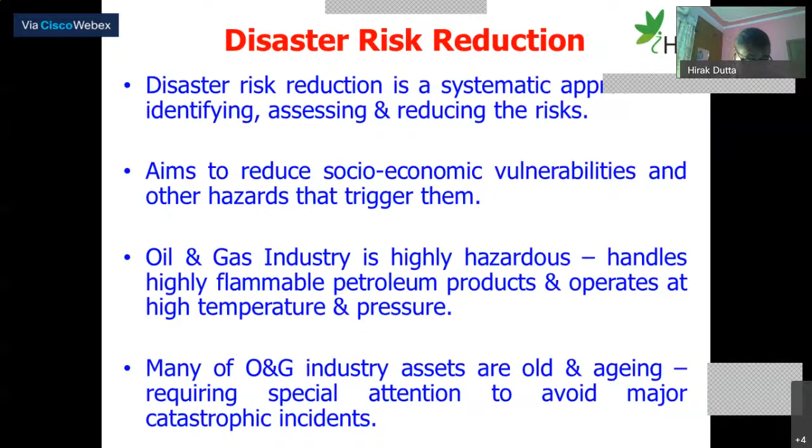There are many pipelines in the country and outside, in the US, which have been operating for more than 50 to 60 years. The Guwahati-Siliguri pipeline is a unique achievement of Indian Oil Corporation - this product pipeline is operating for more than 60 years. It is to the credit of Indian Oil pipeline people that they have been able to manage this asset very effectively and efficiently, and that's the reason we don't have any incident in the Guwahati-Siliguri pipeline.

Now coming to risk reduction in the industry approach - how do we reduce the risks? There are two basic approaches. One is the least preferred approach, which is PPE and administrative controls. I am not saying PPE is not important - wearing helmets, safety shoes, gloves etc. is important. Administrative controls are also important. But the most preferred option for the industry, which most of the industry and Indian Oil definitely does, is engineering control, which is very important.

As I move along, I will talk about some of the engineering controls undertaken by Indian Oil Corporation and many other industries to avert catastrophic incidents and stop disasters from happening. The focus is on how, through good engineering controls, we can reduce the risk - how can you isolate the risk, how can you eliminate the risk. When you talk about risk reduction, design is very important. Inherent safe design - if you can bring in inherent safe design, we'll be able to do a lot of good work in reducing disasters and ensuring we operate in a safe, reliable, and smooth manner.

Maintenance is also very important, and operation is also very important. So when you talk about risk reduction in totality, look at the bigger picture - design has to be good, we need to know how to operate, and we also need to know how to maintain things properly. These are the three important parameters. Unless we attack all these three things, we will not be able to reduce the risks. And if you don't reduce the risks, there will be unsafe situations and catastrophic incidents which may lead to disasters. Our basic objective is how to stop these disasters from happening, and if that happens, what should be done.

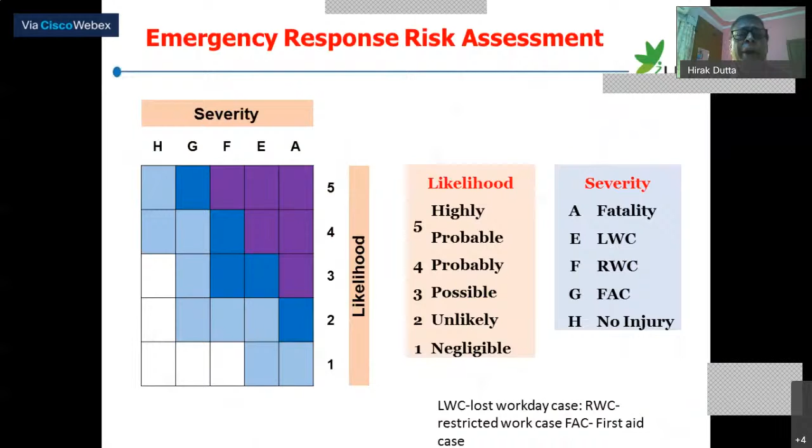Many of you probably know that the Bhopal gas tragedy, at Union Carbide, the fateful incident happened on the night of December 4th, 1984, which is just tomorrow. What had happened at the Union Carbide factory, which was producing pesticide, was the spillage of highly toxic methyl isocyanate, MIC, which was leaked in large quantity.

A large quantity of methyl isocyanate leaked from the Bhopal Union Carbide plant, and in that incident more than 5,000 fatalities occurred, with tens of thousands of people taken ill. It is one of the worst process safety failures, one of the worst disasters witnessed by industry till date. Why did this happen?

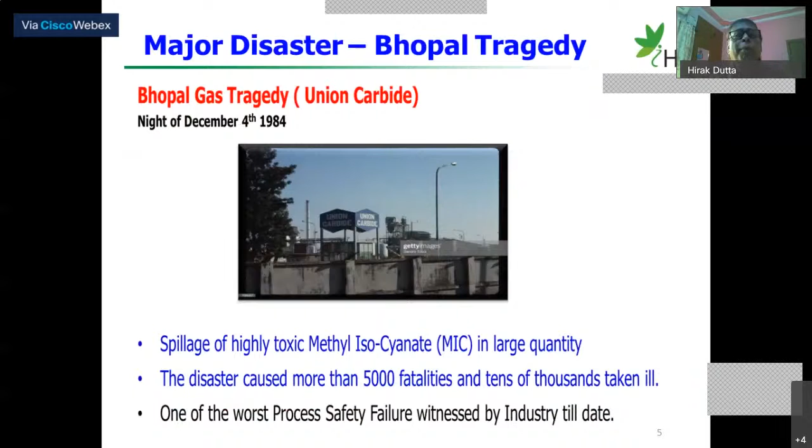Let's look at it and try to find out what engineering controls, what technological controls we need to bring into our system to avoid such major disasters. There was spillage of highly toxic MIC, that is methyl isocyanate, in large quantity from the pesticide plant of Union Carbide to the atmosphere. Now, what caused the incident?

Union Carbide was storing 55 tons of MIC, while daily usage was only 5 tons - that was a major error. That means your daily requirement of MIC was only 5 tons, and you stored 55 tons, which was not required to be stored in such a high quantity.

MIC must always be stored at 0 degrees centigrade, but the refrigeration system was not working, and no care was taken to correct it. It was giving problems for quite some time. People who have gone through the Bhopal case study know that the refrigeration system was not working, and in case there is a MIC leak, there is a scrubber system.

With the scrubber system with hydroxide, it could have easily neutralized the MIC, and therefore the release of MIC, the toxicity of MIC, could have come down. But the scrubber system was kept offline and it was disconnected from the flare.

Now about the flushing of the nitrogen pressurization line - when the plant had a choke in the line, they were trying to declog it with nitrogen pressurization followed by water flushing. But the blind flange was not used while they were water flushing the line.

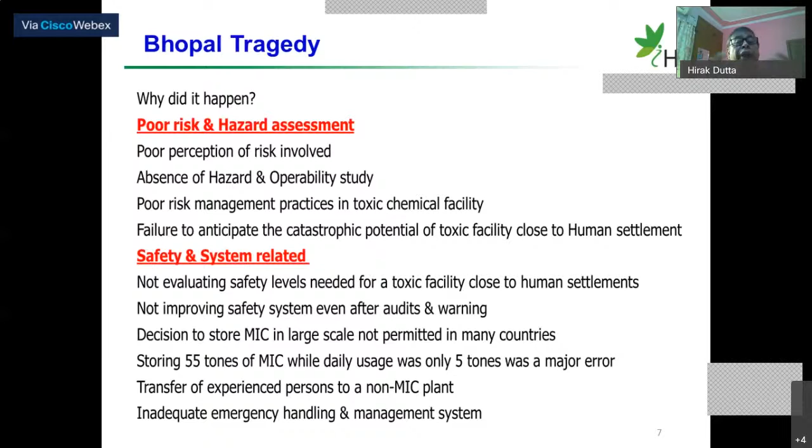But today, luckily, in our country, in many oil installations, we have set up facilities, so there are chances that in case - God forbid nothing should happen, but in case something happens - we will be able to take care of it. Now let me talk a little about the lessons learned from the Bhopal tragedy.

The conceptual framework on such disasters indicates that 80 to 85% of failures are due to leadership and management failures, and only 10 to 15% are due to human error. Most of the time people say it is because of human error - it's not correct. Most catastrophic incidents and disasters happen because of leadership and management failures.

Hazard assessment and risk mitigation measures must be carried out at the project appraisal stage - that is very, very important. Design is very important everywhere. At the design stage itself, do the hazard study, do the quantitative risk assessment study, and after doing the hazard study, incorporate layers of protection and risk mitigation measures.

That should be done at the nascent stage of the design itself, at the project appraisal stage itself. Handling such emergency situations calls for setting up of ERDMP. Luckily, in our country, in every oil and gas industry, in all installations today, we have an ERDMP, thanks to OISD, thanks to PNGRB, and thanks to NIDM, who are following up and trying to educate people on ERDMP, so that we have set up the ERDMP, and this will help us in a long way.

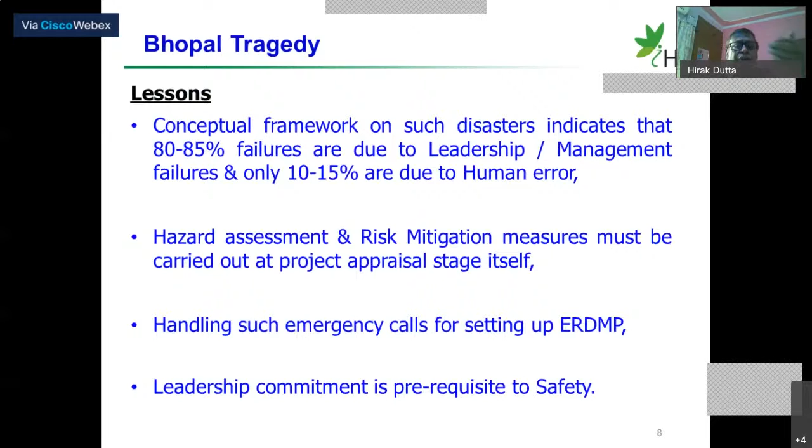Leadership commitment is a prerequisite to manage disasters. Anyway, everywhere leadership commitment is a must. If leaders are not committed, if they don't have that belief, then we will not be able to avoid such type of tragedy, and we will not be able to assure success, because it means good business. So leaders' commitment is essential to achieve success.

But since then, we have had a lot of catastrophic incidents in India and elsewhere too. We had the Jaipur tank terminal incident. We have the Tatipaka natural gas pipeline explosion. We have the FCC incident in Vadodara. We have the Unchahar boiler explosion, where multiple fatalities took place. And more recently, as I have mentioned, the styrene gas leak in Andhra Pradesh.

Luckily for Indian Oil and for many other industries, we have taken a lot of technical measures. A lot of engineering controls have taken place in the oil and gas industry, which has helped ensure reliable operation, and which has also helped ensure that risks have been brought down, catastrophic incidents have been brought down, and disasters have been brought down.

So my focus is on post-Jaipur, post-Tatipaka natural gas pipeline explosion, post-FCC at Vadodara: what sort of measures have been carried out by the industry to ensure the well-being of people, which is the priority of the Government of India and of NIDM. Let's look at the control measures, both hardware and software upgradations, that have taken place around the oil and gas industry and many other industries to reduce the consequences and severity of risk.

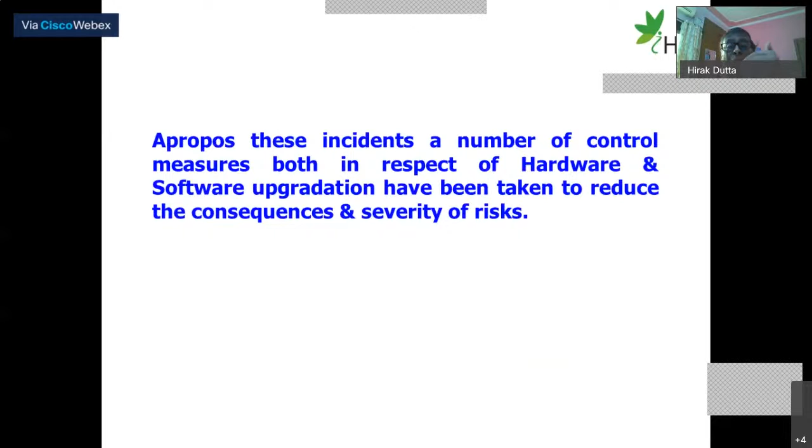That's our prime job, we are engineers. A large number of engineers are attending the session today. An engineer's job is to ensure that a large number of technical controls, inherent safe design, and hardware and software upgradations are in place to ensure reliable operation. It's necessary to avoid major disasters. That's the job of those of us working in industry.

So let's look at some of the hardware and software upgradations that have taken place across the Indian oil and gas industry. I'm not just talking about IOC, HPCL, BPCL, GAIL, Oil India, ONGC - everywhere, including the private sector, a lot of such things have taken place. Therefore, today the industry is much safer than it was earlier. I'm not saying we should be complacent. Yes, we have brought in these technological controls, but now we need deep involvement, a culture. We need to build a culture so that through these measures, which these giant organizations have taken, we can ensure smooth and reliable operation without any disaster.

Hardware upgradations - as you all know how the Jaipur incident happened - the hammer blind, which was an obsolete equipment, has been replaced with double block and bleed valves across the industry.

Additional layers of protection have been incorporated to avoid spillages and tank overflow. Many of the marketing terminals and pipeline terminals, as you all know, have incorporated additional tank overflow protection by installing a hardware switch. You have a high level alarm, and then an automatic hardware switch which will automatically stop the flow of liquid inside the tank to avoid spillage. That technological change has been done.

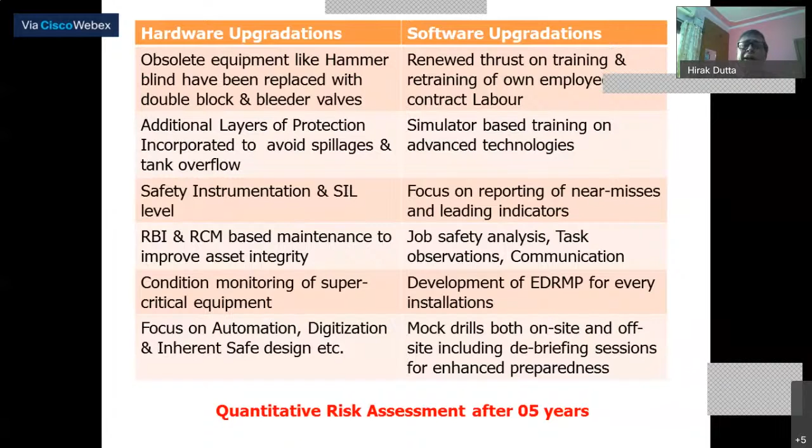How quickly the highways are closed, how quickly we can make a barricade so that people do not get affected. So these are some of the hardware and software upgradations which have taken place post this incident, which has helped the oil industry. If we continue to do this along with the ERDMP and doing mock drills, I'm sure we will not have any disaster in our country.

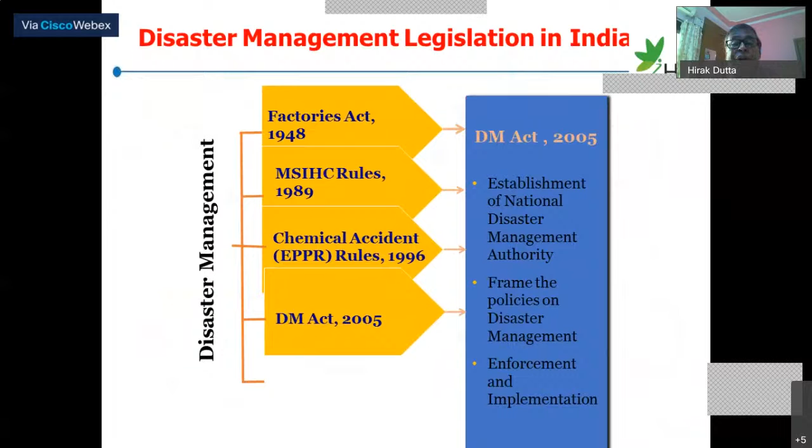Now, disaster management legislation in India - I will quickly go through it. Many of you know we have the Factories Act, the MSIHC rules 1989, the Chemical Accident Rules framed under EPA, and the DM Act, which establishes the National Disaster Management Authority, which frames the policy on disaster management and enforcement and implementation.

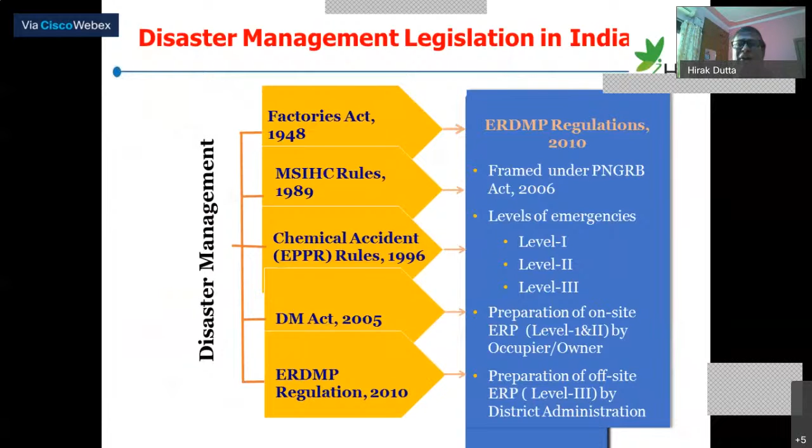And we have ERDMP Regulation 2010, which was framed under PNGRB Act 2006. It has 3 levels of emergencies: level 1, level 2, and level 3. Level 1, as I mentioned, is managed and contained effectively and safely within the site with our available resources.

So that's the on-site emergency. Level 1 means that whenever there is an emergency, we are able to effectively manage it with our own available resources, and no impact goes outside.

Level 2 is when it cannot be managed and contained effectively and safely within the site with available resources. Every oil company has constraints in terms of resources - you cannot have all the resources within your premises. So you may have some constraints, and therefore we require the help of mutual aid members.

All the oil companies have signed mutual aid partnerships with other oil companies. IOC has signed mutual aid partners with BPC, HPC, ONGC, Oil - that's around the industry, even with port authorities and district fire and firefighting facilities. So in any firefighting situation, you will find not only IOC's own fire system but also BPC and HPC fire tenders rushing, along with state government fire tenders, to provide mutual aid support.

In the case of Jaipur, there was an acute shortage of water. How do you overcome that? Through the mutual aid partner system - we take water from nearby installations. Provisions have been made in our system so that in case there's a problem in an IOC installation, you can take fire water from BPC or HPC or a nearby installation. A connection has been made into the fire water inlet line.

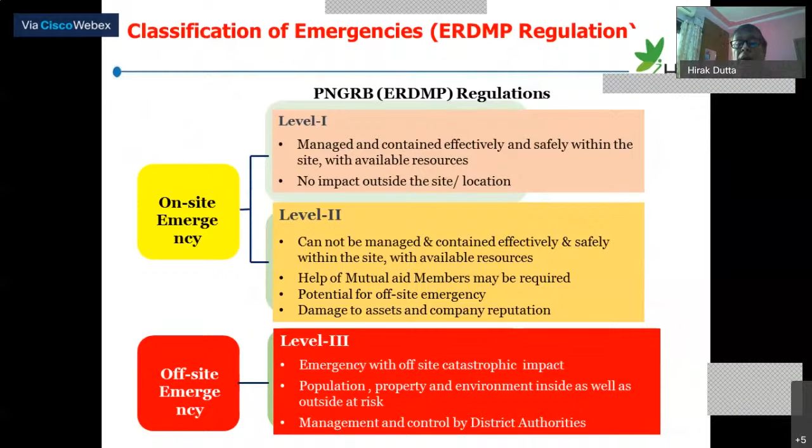For 11 days, the fire was fought. There was no harm to the people outside the boundary wall of IOC. In this incident, we must have lost 11 lives of our own people and contract workers. But the well-managed thing was that nobody beyond the boundary wall of the IOC Jaipur terminal had a single injury. Because of good communication, the mutual aid system, support by district authorities, and support of NIDM, we were able to contain the catastrophic incident of Jaipur within the boundary wall.

Now let me talk about the performance improvement cycle. I'll go through it quickly. Risk identification and prioritization. I mentioned it, I'm mentioning it again. For effective crisis management, risk identification is a priority.

Planning and control, in which ERDMP development has been done, focuses on mock drills. Please conduct mock drills as is being done in the Indian oil and gas industry, both on-site and off-site. Implementation involves situation assessment, protecting life and assets, and implementing the plan. And management evaluation is restore and repair - that's very, very important. After anything happens, how do we restore and repair?

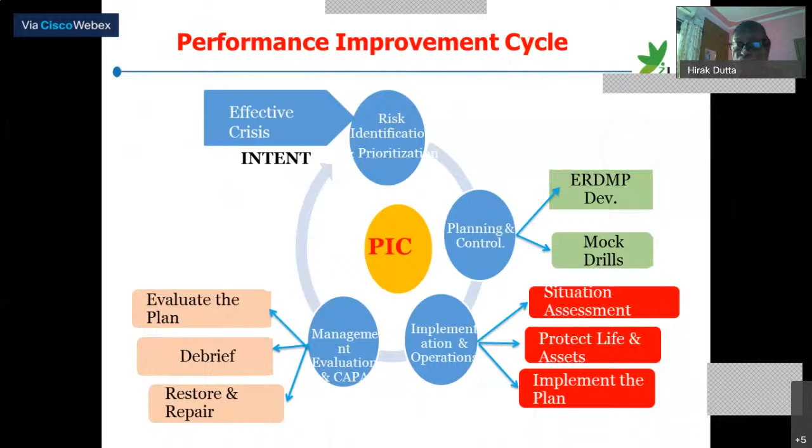These three things we know: risk identification, then planning with ERDMP and mock drills, implementation to assess the situation and protect life, and finally management evaluation to restore and repair, debrief, and evaluate the plan. We need to evaluate the plan to see where there are shortcomings, so management review and improvement is very, very important.

Post-crisis review is very, very important. Once you do the post-crisis review, it gives feedback to the risk identification stage, and thereby the cycle goes again and again, and we achieve an improvement cycle. That's how we can manage this.

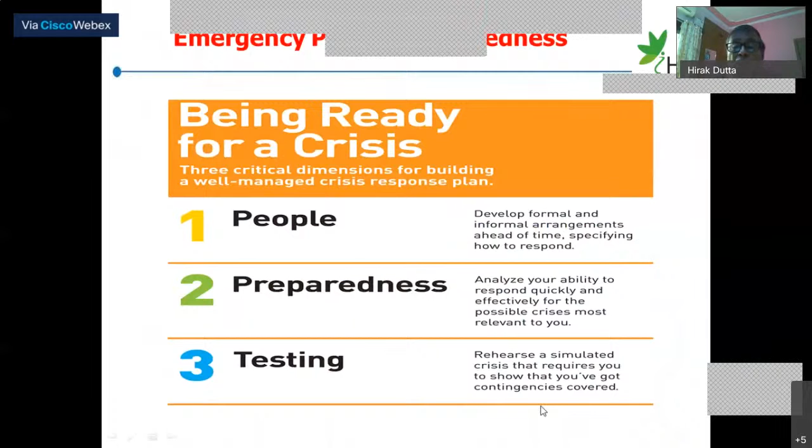Third is rehearse the simulated crisis. Therefore, on-site and off-site mock drills and simulator-based trainings are important. Create a crisis and then rehearse. That requires you to show that you have got contingencies covered. If you can rehearse and simulate the crisis, you'll be able to do it.

But there are some challenges. The challenge is time is the key element. People are the priority. Task performance and resource constraints could be there, but then we have to overcome all those things.

Key information in decision making is very, very important. So sharing the key information is very, very important. Whosoever is in the decision making process, we need to share the information and communicate with the people. We need to understand that if we lose time in a hydrocarbon fire, you will not be able to manage it. The essence is how quickly we respond. So time is key, share the information.

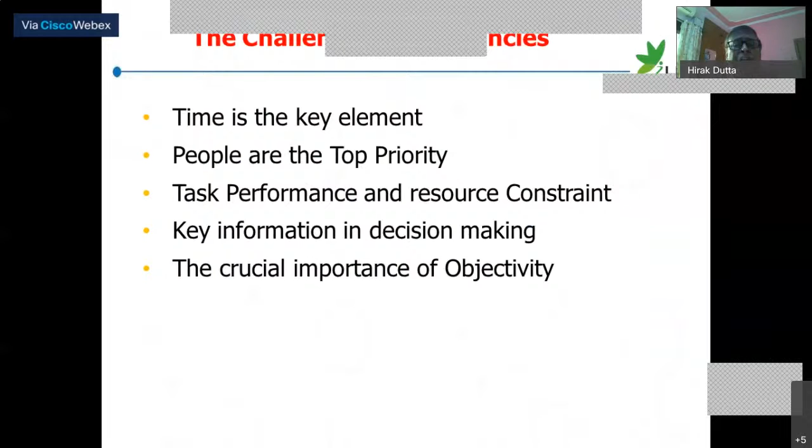The crucial importance of objectivity - that's very, very important. And finally, I will talk about this slide before I conclude. I think I have overshot the time a lot.

Assess the situation. Secure the area. If by chance there is some contingency, assess the situation, secure the area, and activate the incident command system. Through a single command system, evaluate the situation. I'm sure yesterday it has been talked about, so I'm not going into great detail.

Ground communication is very, very important. One person must take the command. I have seen in case of fire, there are too many people given instructions. Now, if too many people are given instructions, we will not be able to succeed in fighting the catastrophic incidents or in containing the disasters. So a clear single incident command is very, very important.

Identify the strategy and roll out the action plan. And finally, you must review, evaluate, and revise that plan. That's very, very important.

Call for assistance - external assistance is required. Please understand the well-being of the people, the well-being of the public at large is very, very important. And therefore, calling for external assistance is nothing wrong. We have mutual aid partners over and above. If you require some leaders, some knowledge, some domain experts, call them, because people who have not seen a hydrocarbon fire in their life will simply run away from that place.

Most important thing is work together. That's very, very important. If you don't work together, we will not be able to succeed. So therefore, I always say building a team is very, very important. And when you talk of building a team, it's the job of a leader. Each one of us are leaders, we have our own circle of influence. So it's how we build a team.

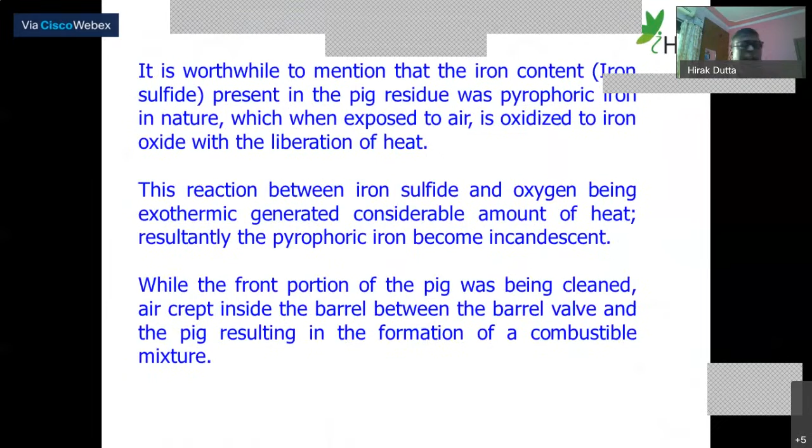I think with this I will conclude. I thought I would share an incident in the LPG pipeline, but not today - sometime next time I will share, because I think I have already overshot my time. It was 45 minutes that was given to me. Next time I will talk about this.

My final slide is: people, not the plan, manage the emergency. It's not the plan, it's the people that manage the emergency. So focus must always be on human resources - on training them, educating them, motivating them. That's very, very important, because ultimately people manage the process and technology.

Technological changes and upgradation have been brought into the Indian oil and gas industry and many other industries. Many process changes have been brought about. Many systems, procedures, and best practices have been introduced into our organizations, but those are managed by people. So we need a motivated team - a team with experience, because domain knowledge is very, very important. Unless we have domain knowledge, we will not be able to succeed. Therefore, such training, education, and interventions are very effective. Each of the oil companies is doing this.

Now, how do you overcome a disaster management situation? Through a series of training programs and sharing of ideas that have been conducted. My part - I have also thought of sharing this with all of you. Thanks, be safe, and take care.

If you have questions, please raise them. Otherwise, this is my email ID - you can ask me the questions. Thank you very much, sorry for overtaking the time.

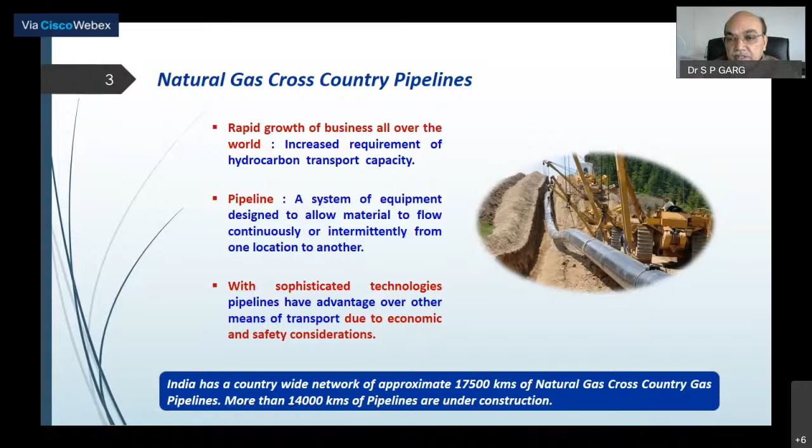Now, what are the uses of this natural gas? I think most of us would know. We have a PNG network, piped natural gas, through which domestic gas is also supplied. There are 72 lakh domestic customers. And then we have CNG, compressed natural gas, through which our vehicles run.

For those facilities, we have 2,290 CNG stations in the country, and more than 37 lakh vehicles are operating on CNG.

The third term is liquefied natural gas, that is LNG. LNG is transported through ships and regasified at LNG terminals. You import the LNG from outside through ships, and they reach our shores, and there with the help of LNG terminals, the regasification of liquefied natural gas takes place, and it goes back into the pipelines through which it is supplied. Now, India has today 6 LNG terminals with total handling capacity of 42.5 MMTPA.

You know, there is a lot of focus on increasing energy uses. Today, natural gas in the energy mix is about 6.2%, which is going to be raised to about 15% by 2030. That is the target of the country.

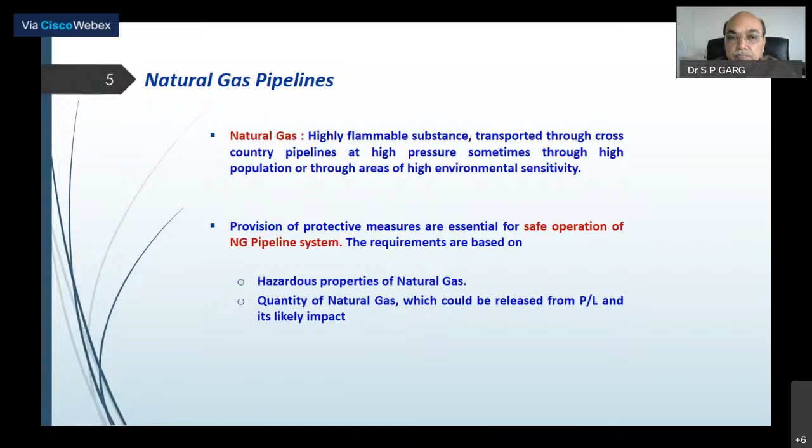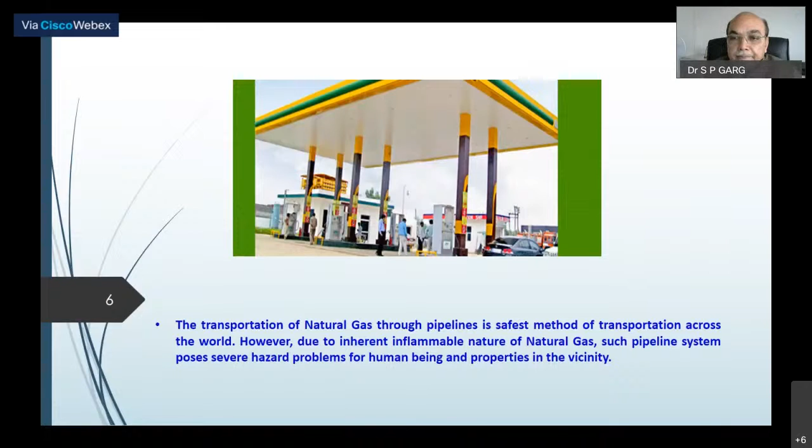As I mentioned, these natural gas pipelines are the safest mode of transportation across the world. However, due to the inherent flammable nature of natural gas, such pipeline systems also pose severe hazard problems for human beings and properties in the vicinity. What are the major hazards? As I mentioned, they can easily catch fire. So there could be different types of fires like jet fire, flash fire, or there could even be explosion.

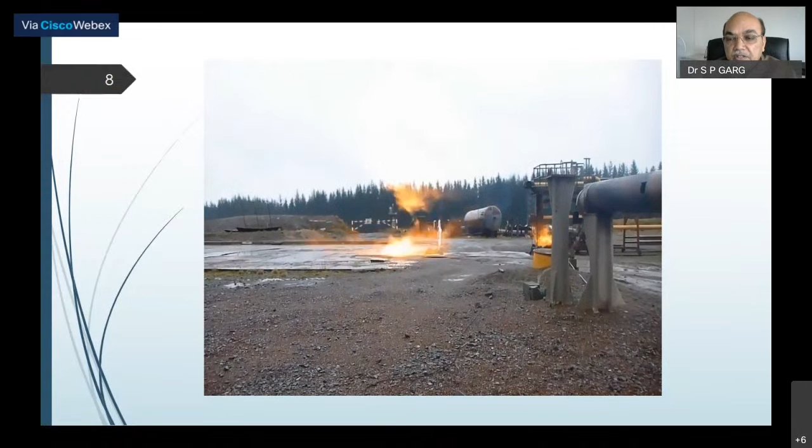Now, if we look at the example of jet fire, this is a small video showing you the jet fire. Jet fire is fire getting protruded onto one particular object, like a jet. That is called jet fire.

Another example is about flash fire. This is one of the pipeline incidents, which is a flash fire incident.

Now, if you look at some of the data from other countries about various incidents and accidents, this is about EGIG incident data. EGIG is a group of 6 European gas transmission system operators. In 1982, they took the initiative to gather data on the unintentional release of gas in their transportation pipeline system, also known as the EGIG group.

They have maintained an incident database of 15 European countries on more than 143,000 kilometers of pipelines. So it's very good, authentic data.

When you look at this data, you find that in the incidents studied from 2004-2013, about 10 years, the reasons behind the incidents were 35% external interference, 24% corrosion, 16% construction defects or material failures, 4% hot tapping incidents, ground movement about 13%, and other unknown reasons about 8%. So these are the various reasons for pipeline incidents which have happened all over the world, especially in European countries.

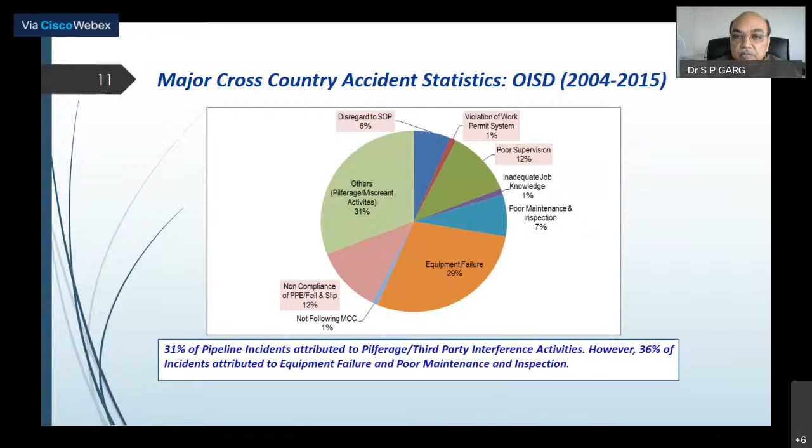Now, if you look at external interference, what could it be? These are like digging, piling, groundwork, etc., going on the ground, maybe by some other agency. This happens a lot nowadays when city gas distribution networks are being laid in cities. The third party comes and does some other construction activity without understanding there is a pipeline there, so they damage it. Sometimes construction equipment like bulldozers and excavators also damage the pipelines. The casing and sleeves are other reasons for damage to pipelines.

Corrosion, of course - external corrosion, internal corrosion - are also main reasons for failure of pipelines. Construction defects, material defects, welding defects, or failure of other components could also lead to pipeline failure. Ground movements, for example, a dike getting broken, or erosion of river banks, or flood-prone areas. Landslides, mining, and other reasons. Other reasons could be lightning, poor maintenance, etc. So these are the primary failure reasons of cross-country pipelines.

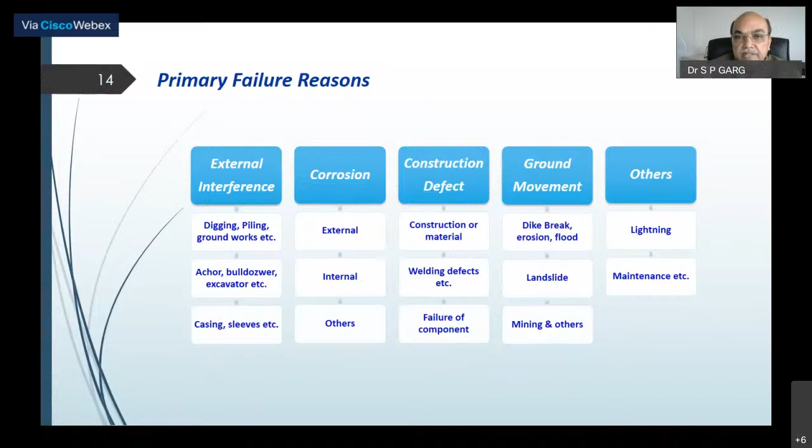Now, what are the disaster risk reduction measures if you look at design and construction? While laying these pipelines, they are designed as per national and international standards, which are guidelines from OISD, PNGRB regulations, ASME 31.4B, API regulations, etc. These are followed during design, construction, operation, and maintenance.

Environmental consideration based on environmental impact assessment and risk analysis study for the pipeline and stations are also considered. Hazard and operability study and hazard analysis are also considered. Proper layout and inter-distance of facilities as per OISD standard 226 and PNGRB regulations - these are, I would say, the mother standards for Indian natural gas pipeline operators.

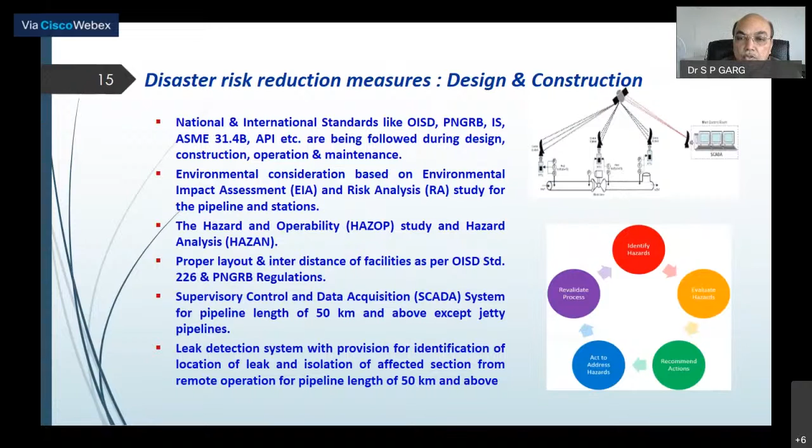Now, supervisory control and data acquisition systems for pipeline length of 50 km and above are provided to have better control and monitoring of the pipeline. Leak detection systems with provision for identifying the location of a leak and isolating the affected section from remote operation are also provided for pipeline length of 50 km and above. Mind you, we are generally talking about cross-country pipelines which run into thousands of kilometers, so it's necessary to have such systems.

Besides that, there are sectionalizing valves provided at a distance of not more than 32 kilometers between two valves. This is necessary for emergency isolation. If there is sabotage or damage of the pipeline, then particular sections can be isolated through these valves. These valves are remotely operated and can be operated from a long distance, so safely you can operate these valves, isolating and evacuating the pipeline section.

Within city areas, in the last couple of years, we have converted many isolation valves into auto-actuated valves. With the difference of pressure, the valve gets automatically actuated and the line gets cut. This is done to minimize damage in urban areas, which are more prone to damage, by immediate closing of the valve.

Now, pigging facility is provided for 4-inch and above size pipelines, with length 10 km and above. Pigging is basically an activity to clean the pipeline from inside. Over the years, as hydrocarbon passes through the pipeline, there is accumulation of various impurities and dust which need to be cleaned. If not cleaned, they can create internal corrosion and reduce the capacity of the pipeline. So pigging is done from time to time.

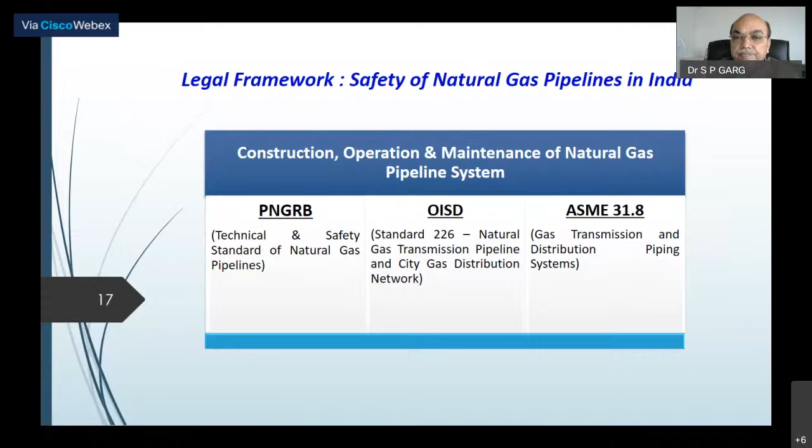Now, broadly, how do you manage these natural gas pipelines so they run safely? A SCADA system is provided, that is Supervisory Control and Data Acquisition, which increases efficiency by minimizing fault and response time, and also maximizes public safety and site safety. This SCADA complete control is from the respective control rooms.

Then you have a distributed control room system to maintain real-time data of all pipeline parameters, supply and operational control of facilities, and instant leak detection with the help of remote terminal units.

There is an integrity management system through software solutions, for instant risk overview of asset systems. All asset pipeline data is saved in one central data management system for planning, execution, and tracing of all integrity management activities, with integration of existing GIS and ERP systems.

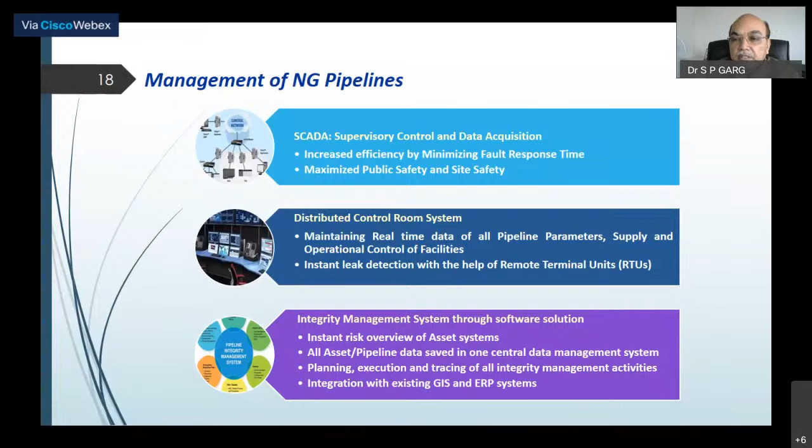The entire pipeline network has been mapped on GIS, so that if any incident happens anywhere, even in the remotest area where the pipeline is passing, then sitting centrally, you could know the exact location, what resources are available, what nearby villages exist, where the hospitals are, where the fire stations are, and where the police stations are. All this information is mapped in advance for all the pipelines. This helps in early addressing of the emergency situation.

Then we have nodal control centers in the form of NGMC and RGMC, that is National Gas Management Center and Regional Gas Management Center. They monitor round the clock the leak detection system, communicating and handling emergencies. There are also emergency communication system centers monitoring inventory control, and remote operated shut-off valves facilitating remote closure of valves from the control rooms, enabling rapid closure of valves to control inventory in case of any leakage.

Now, if you talk about GAIL India, how they operate and control the movement of gas through these pipelines: in Noida, there is the National Gas Management Center, called NGMC, and Regional Gas Management Centers are there all over the country, through which not only is gas movement monitored, but they are also declared centers for controlling emergencies.

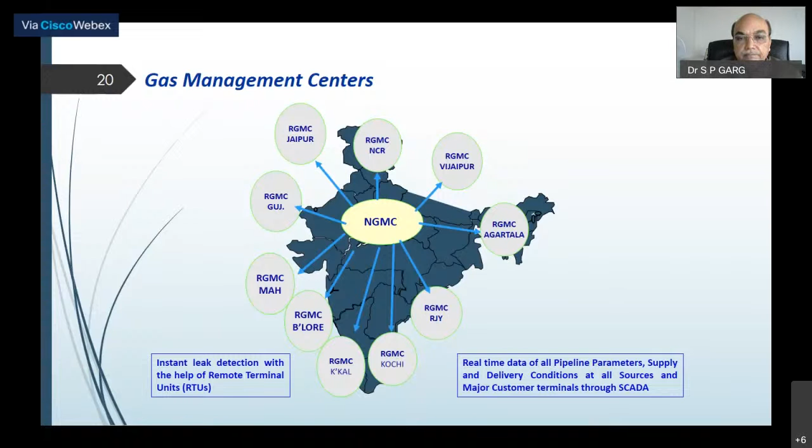Now these pipelines run through an area which has the right of way, we call it ROW. This is an area, depending on the size of the pipeline, that could be 15-meter wide, 20-meter, or 30-meter wide land strip where you are permitted to lay the pipeline. In case of requirement, you can take vehicles, bulldozers, or whatever construction equipment is required into that area. No permanent construction is allowed within the ROW area, where the pipeline is laid underground.

The road and highway crossings are inspected once in 3 months. River crossings are also inspected twice a year, before and after the monsoon.

There is a routine of pipeline patrolling through ground patrolling. A person goes from one end to the other, the specified distance, and checks there is no encroachment of pipeline, no pipeline exposure, no damage to the pipeline. In urban areas, this is done once a week, though nowadays it is almost every day.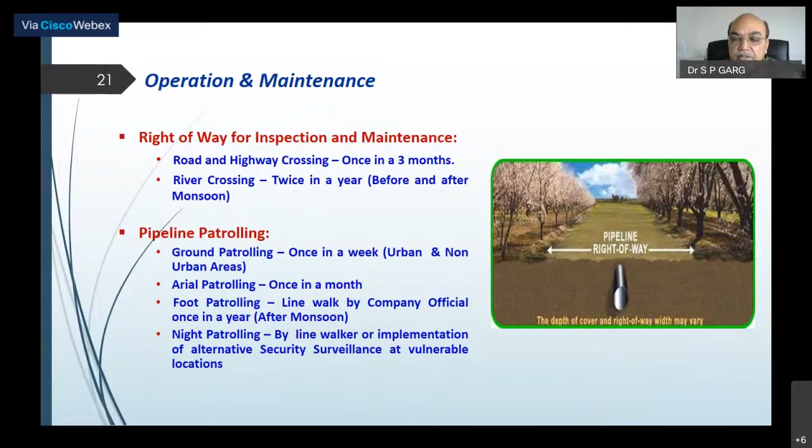Pipeline pigging - there is an activity called cleaning pigging. This is necessary to be done regularly, once a year, so that there is no accumulation of dirt and other impurities. There is another thing called intelligent pigging, which is done at least once in 10 years to compare the internal data gathered over the baseline data from when the new pipeline was laid, and to find out internal defects in the pipeline if any, and take corrective actions.

Now, if you look at this small video, it shows how the pig runs through these pipelines and how the threats are identified.

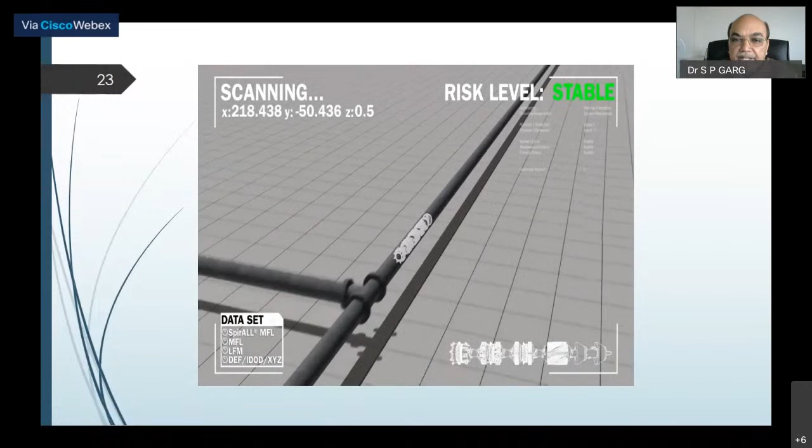This is a kind of inline tool which we call an intelligent pig, which is inserted in the pipeline and runs through it, continuously scanning the internal surface so that you would know what defects there are, if any.

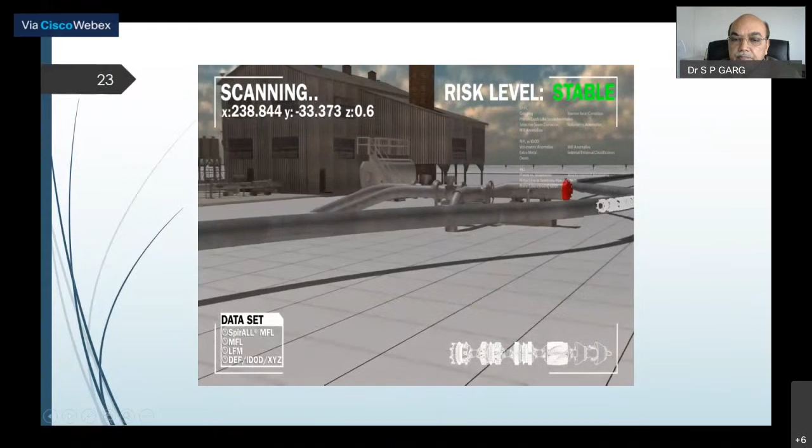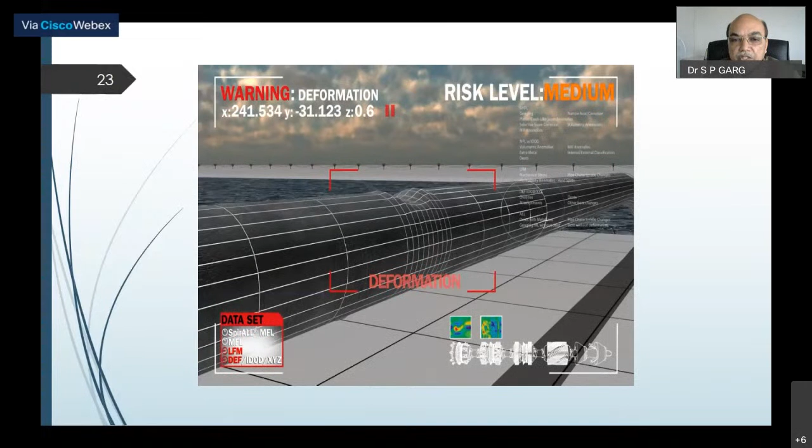See, the deformation is immediately noticed, and that will come on your computer. You can immediately plan measures to rectify it.

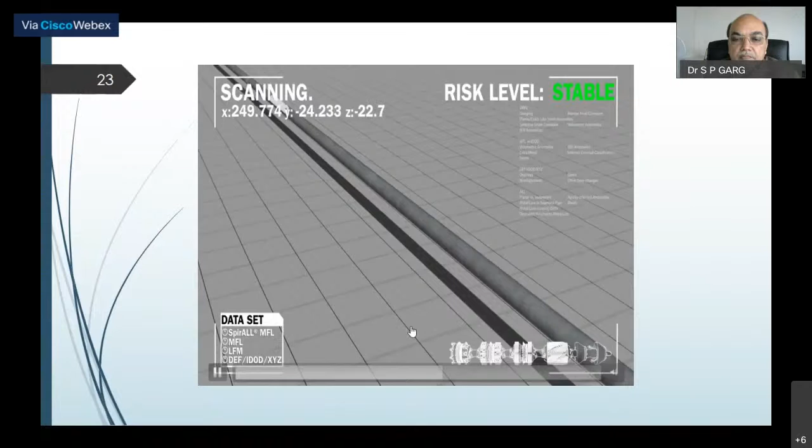Mechanical damage was also immediately noticed.

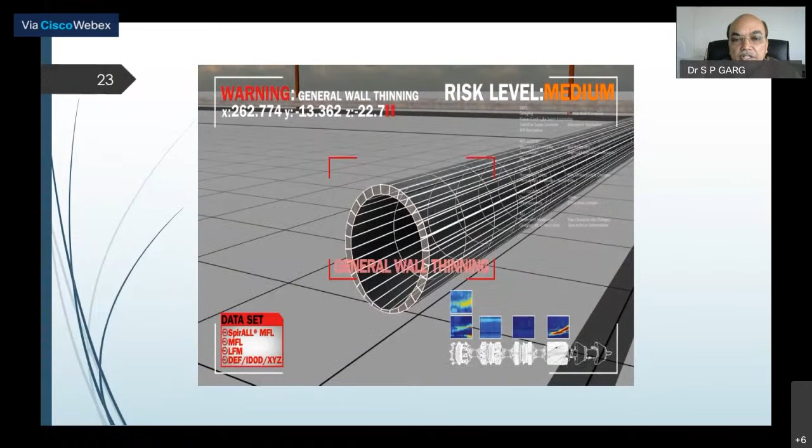General wall thinning - the wall has thinned, so naturally that section needs to be replaced.

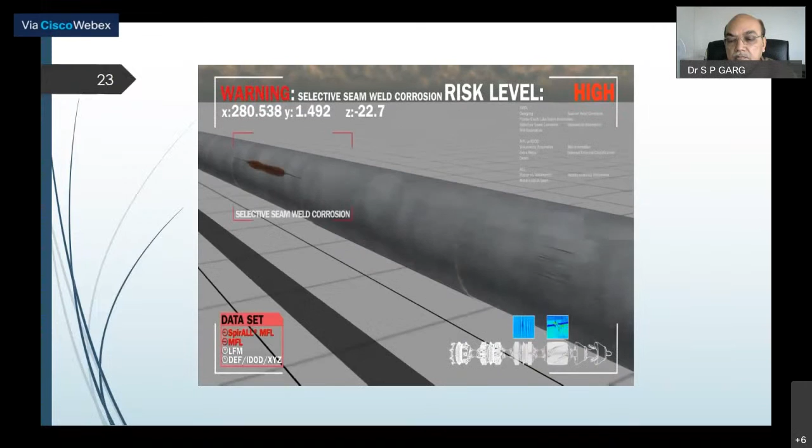Seam weld corrosion. So that is how it is.

Now, inspection of the cathodic protection system. You know that to save the pipeline from external corrosion, cathodic protection is provided. This cathodic protection is required to be inspected through pipe-to-soil measurement, measuring the pipe-to-soil potential at a feeding point. This is done once a fortnight, which is called PSP. PSP reading at the test lead point all along the pipeline is also done once every 3 months.

The coating survey - the pipeline is provided with a coating to prevent external damage, so these coatings are required to be surveyed. Various kinds of surveys ensure the integrity of the coating: Pearson survey, direct current voltage gradient survey, continuous potential logging survey, and so on.

There have been incidents of intrusion, as I mentioned, so today there is a technique for pipeline intrusion detection. If somebody is planning to intrude on a pipeline, damage it, or is unknowingly moving a tractor or other equipment over it, this pipeline intrusion detection system lets you know in advance that some activity is happening. From the control room, a message immediately goes to the rapid action force, generally provided these days especially in city areas, to rush to the site and stop such unauthorized activity.

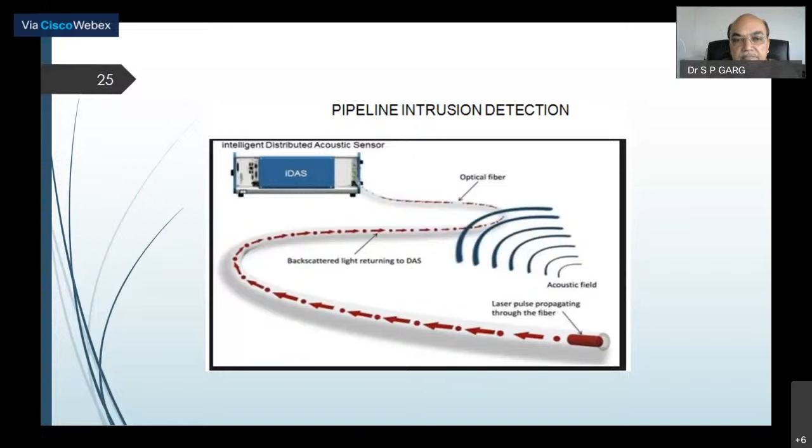Besides that, operation and maintenance procedures are written down in various SOPs, along with operating procedure manuals and maintenance procedures for the entire pipeline system, considering the requirements of the Oil Industry Safety Directorate and PNGRB.

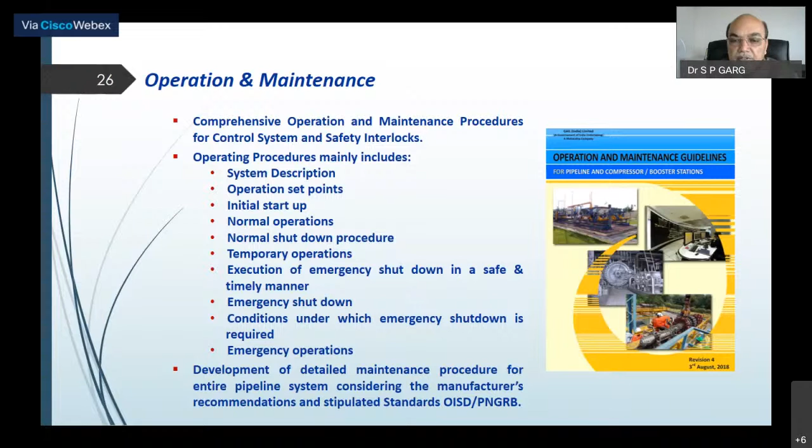Some of the best safe O&M practices maintain safety consistent with specified national and international codes and standards, providing the latest process safety information, formulating SOPs, and revisiting them. We revisit all the SOPs at least once a year.

Within plant facilities, the SOPs are revisited once every 6 months, and operators are involved in rewriting them. At some locations, we have also started taking their written consent that they have understood the SOP, and we have made animated films for better understanding of the SOPs.

Another measure is to implement an integrity management system to minimize the probability of pipeline failure, and to keep focus on the quality of outsourced manpower. A lot of outsourced manpower is taken in the oil and gas industry, so the quality is to be maintained.

They should understand the risks and hazards and how to combat them. This includes engagement of employees with minimum qualification and experience as per various codes and provisions, and engagement of subject matter experts on aspects like pipeline corrosion, cathodic protection, inline inspection, coating survey, metallurgy, welding, etc. We have hired such subject matter experts who provide their expert opinion from time to time. We also developed in-house manpower with required skills, like NACE certified corrosion experts, for pipeline safety.

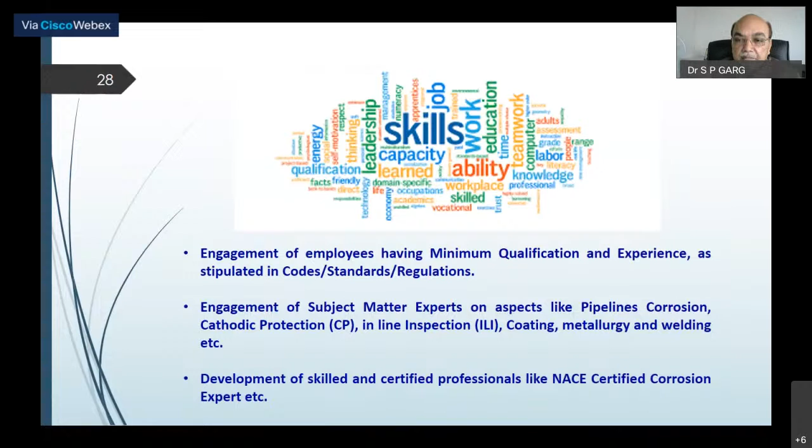As I was mentioning, all the pipelines have been mapped on a GIS platform containing all pipeline related information along with satellite imagery and cadastral maps, etc. We have also created a centralized pipeline integrity management system based on risk-based analytics software. We created specialized groups within the company called CIMG, Centralized Integrity Management Group, and RIMG, Regional Integrity Management Group. Their main purpose is to focus on pipeline integrity management, leveraging IT in safety functions like work permit systems, incident and accident reporting analysis, risk assessment, compliance, etc.

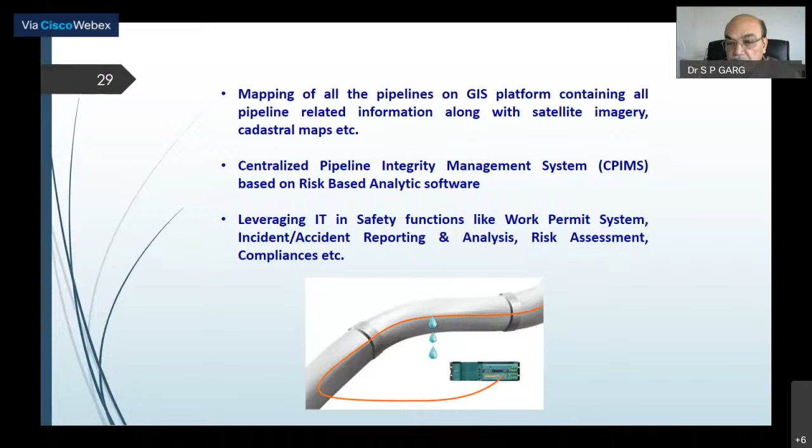For integrity management tools, you have already seen the Intelligent Pig. These are other activities done from time to time: thickness assessment and periodic reviews, pressure testing, and other things which I have already mentioned.

Now let's have a small video of 5 minutes. You can look at the pipeline technology.

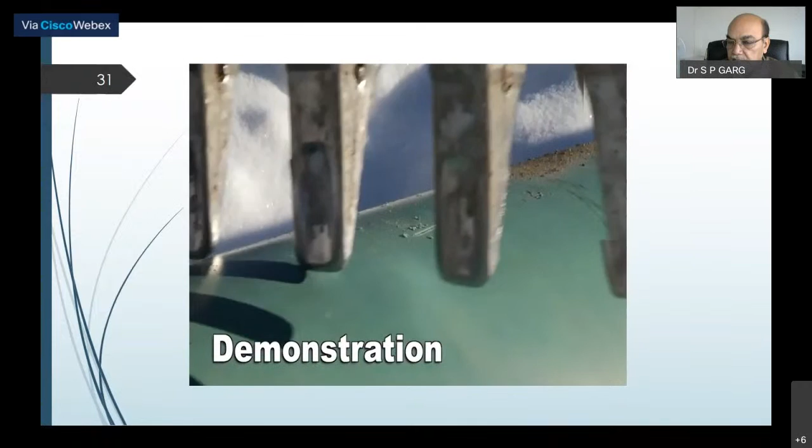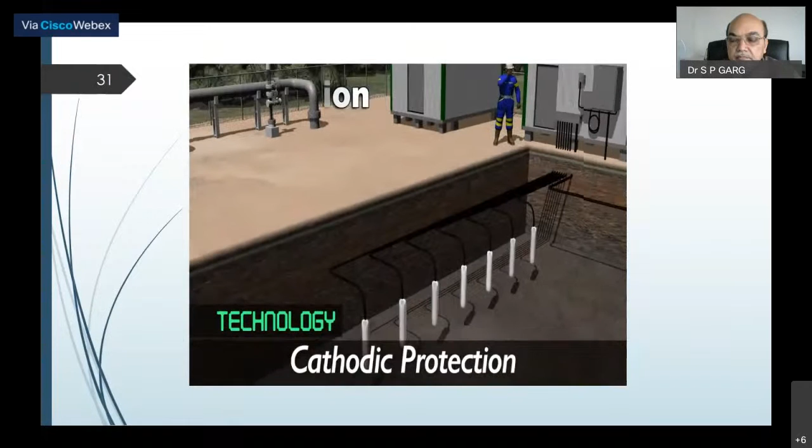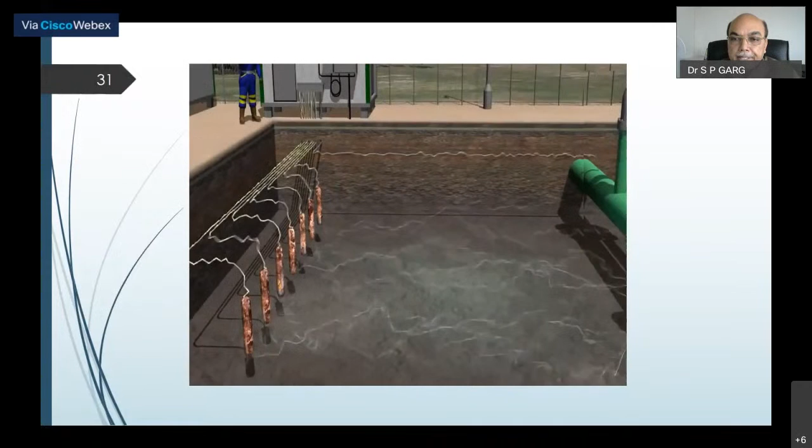So let's begin. What if a machine were to damage a pipeline's protective coating? Bared steel would naturally turn to rust, but pipelines have protection against rust. Along the pipeline, they install what are called anodes and supply small amounts of electric current. The current flows through natural ground moisture to the pipeline and redirects where the corrosion will occur. Pipelines have been doing this for decades now. The current encourages the anodes to corrode, and the pipeline becomes a cathode, protected from rusting in case any steel has somehow become exposed.

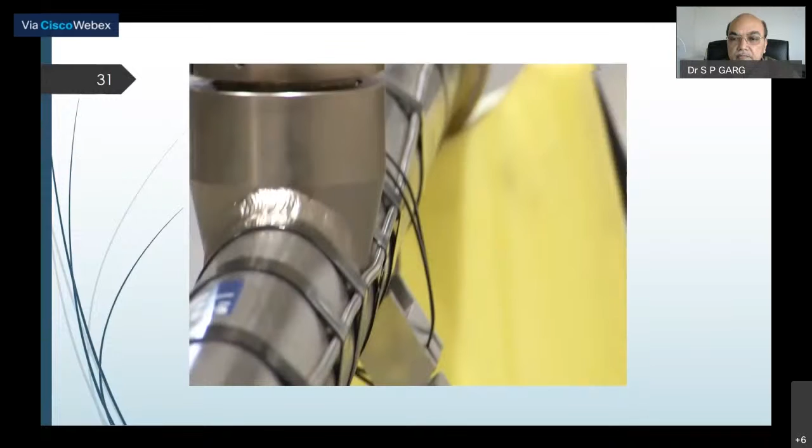Pipelines have leak and hazard detection. In this new system, a continuous stream of data is collected and transmitted by next-generation fiber optics. The fiber optic is both transmitting data, but more importantly, is acting as a sensor on a fully distributed basis along the length of the pipeline, measuring acoustic, strain, and temperature, accurate to within 1/100th of 1 degree. Pipelines are run from sophisticated control centers fed by thousands of data points.

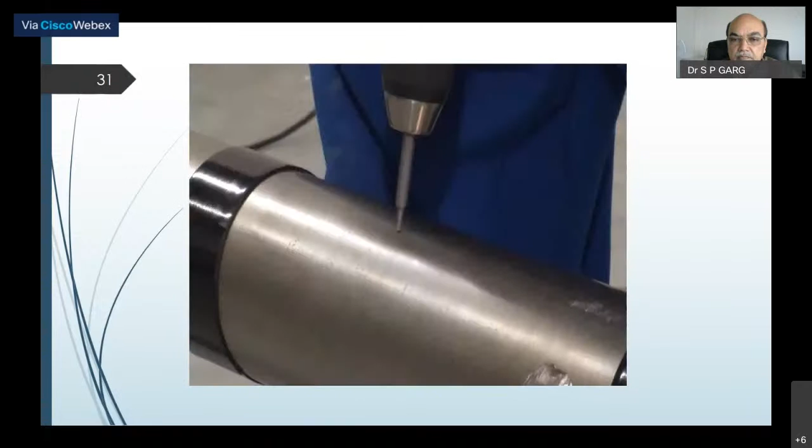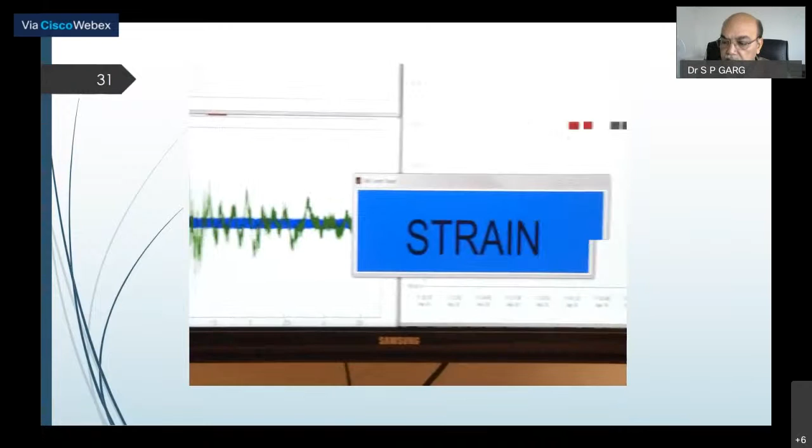Let's say there's a heat buildup from maybe a forest fire. A display will appear in the control room, followed by a warning. What if someone tries to maliciously damage the pipe? The operator sees this warning. What if there's stress on the pipe, frost heaving, or machinery that's too heavy? The operator would get a strain warning. And if there's a leak, a small nitrogen stream here is simulating a leak, and the control room gets a display and an alarm.

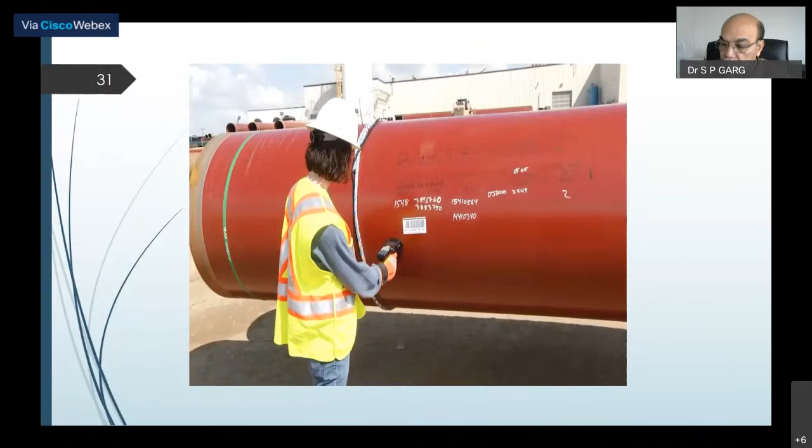Pipelines track detailed data about each length of pipe in their pipeline, but now technology allows them to track more easily and reliably, and track a lot more information: Pipe ID, heat number, length, diameter, wall thickness, and most importantly, the steel grade.

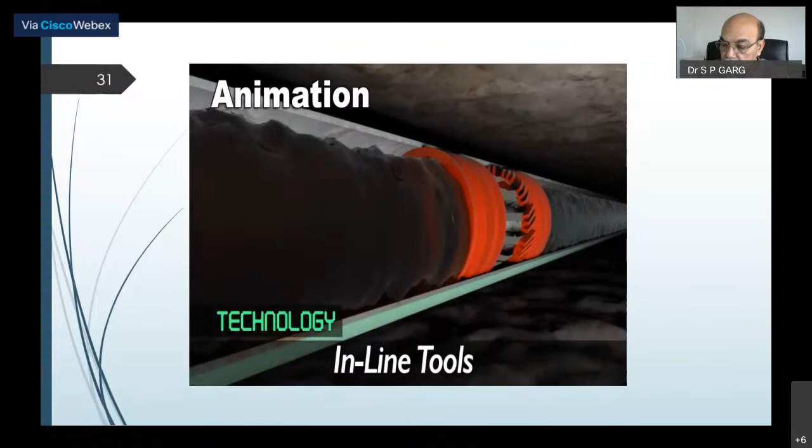Pipelines depend on inline tools commonly called pigs. Most times they're for maintenance, often with brushes to clean the pipe. But there are also smart pigs for early detection of problems, bristling with technologies to identify wear or cracks usually too small to see.

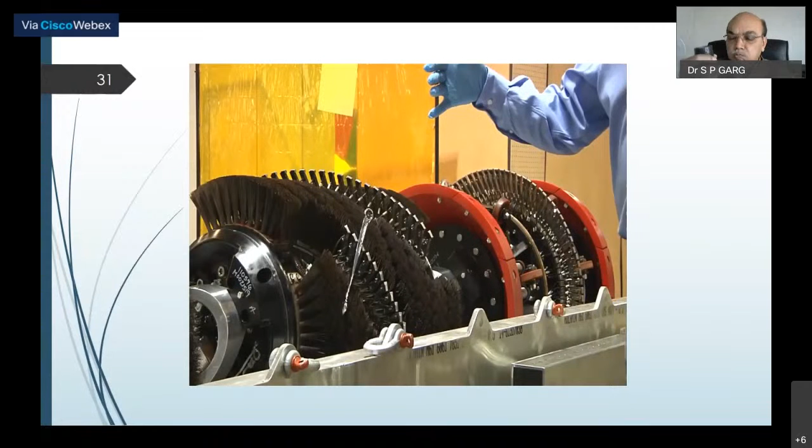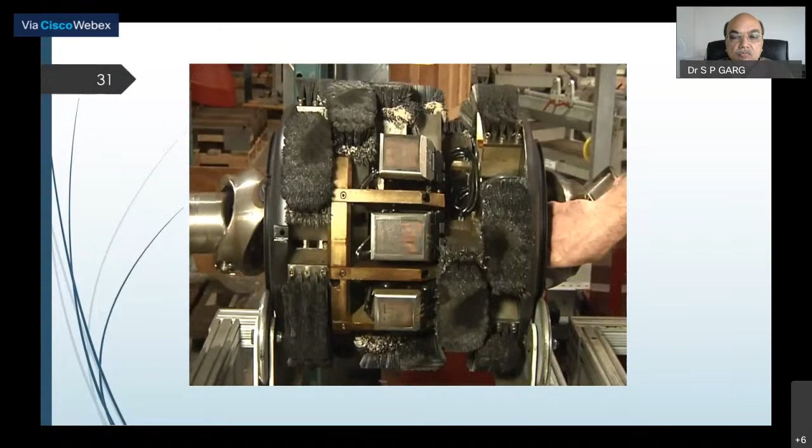Powerful magnetism, hard drives, and GPS track. The odometer measures to within millimeters where anomalies may be. This module sends sound waves around the pipe's circumference—multi-million-dollar tools to detect trouble years in advance.

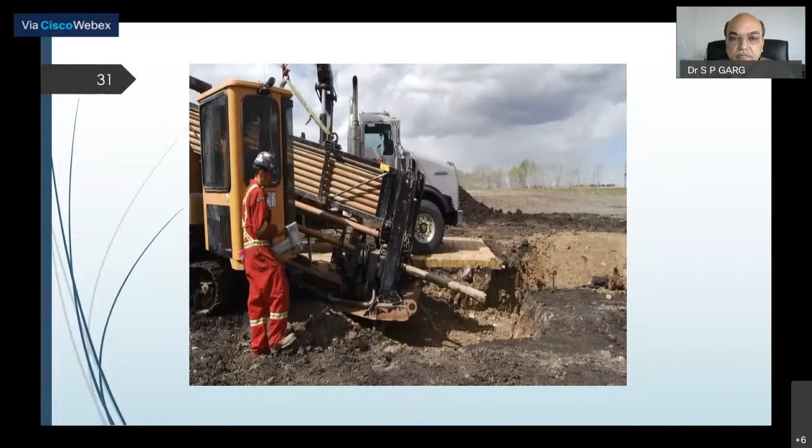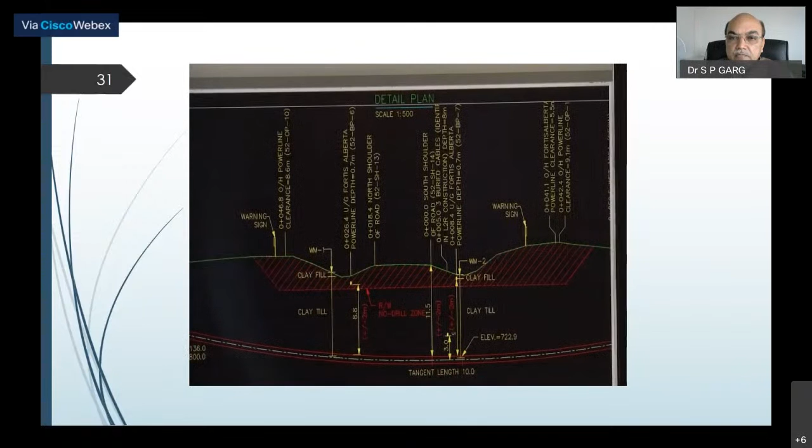Data from a smart pig brings us to look at horizontal directional drilling. We're at a highway bore here doing some directional drilling underneath the highway, because the smart pig has found an anomaly in a pipeline, but it's under a 4-lane highway. You can't close the highway to dig up and inspect the pipe, so they will drill to install a quarter kilometer of replacement pipe under the highway. Computers tell them what to expect in a situation like this. There is a buried cable here, and we have requirements to go like 3 meters underneath those cables.

One amazing thing is how they can so precisely track and steer the drill bit. Drilling begins, and they have lots of pipe lengths to extend the bit as they continue and reach under the highway. The key is this tracking device that tells them within an inch or so where the steerable bit is. We have our pitch.

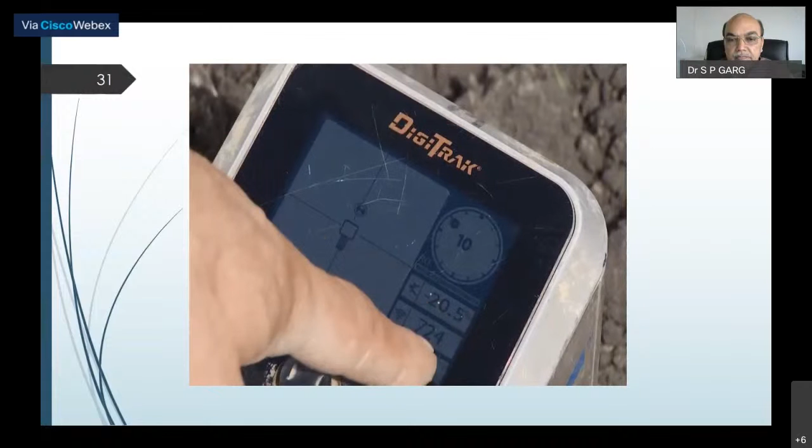What position are we steering? On the other side of the highway, they have steered the bit exactly where they want.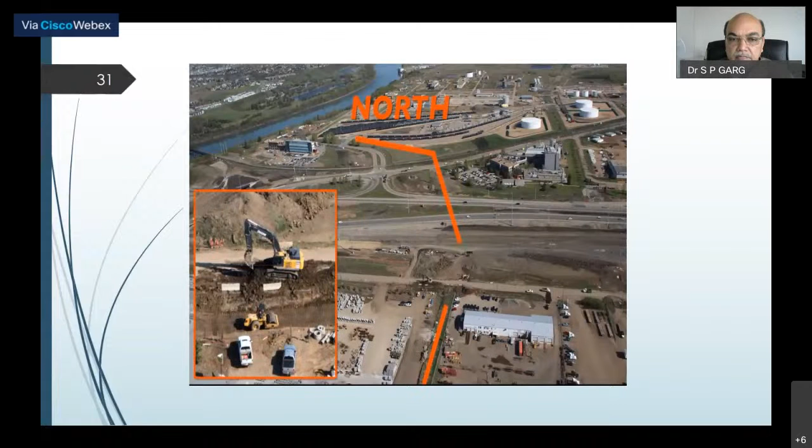Our best protection is still the trained pilot, who still best knows what to look for. But a good digital picture and technology helps the pipeline company know what's going on along the many kilometers of its pipeline. Good people making good use of good technology.

Of course, this is the latest technology, which may not be there everywhere, but these are the measures coming up, and many measures are already there. Pipeline surveillance through drones has also started, as Mr. Dutta was mentioning. So it's a continuous improvement process, and the pipeline industry, oil and gas industry, is investing a lot of money in technology, and technological advancements are regularly happening.

Now, if you look at safety, health and environment management, like every company, you have the HSE policy statement, signed by none other than the CEO himself, which gives the guidelines and direction on how to operate the safety management within the company.

A set of detailed processes supports each activity of the HSE management system: development of operation and maintenance procedures, implementation of control and monitoring activities, and periodic monitoring, review and reporting of performance.

We have a system of observing a monthly safety day on the 10th of every month, wherein every site has to compulsorily devote half a day to reviewing the safety management at their site.

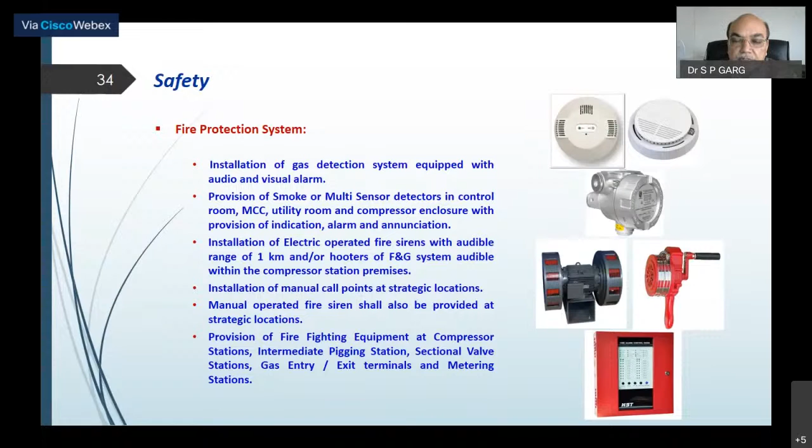I will not go into detail of the fire protection system. This is just a glimpse of it. At each site, especially gas compressor stations where compressors are provided to boost the pressure, an elaborate fire protection system is provided, as per standards and sometimes beyond. This includes installation of a gas detection system with multi-sensor detectors in the control rooms for detecting smoke or fire, hand-operated sirens for small installations, and electrical sirens at other locations which can sound up to 1 kilometer, plus firefighting equipment like fire tenders, diesel pumps, pipeline systems, hydrants, and monitors provided at these compressor stations.

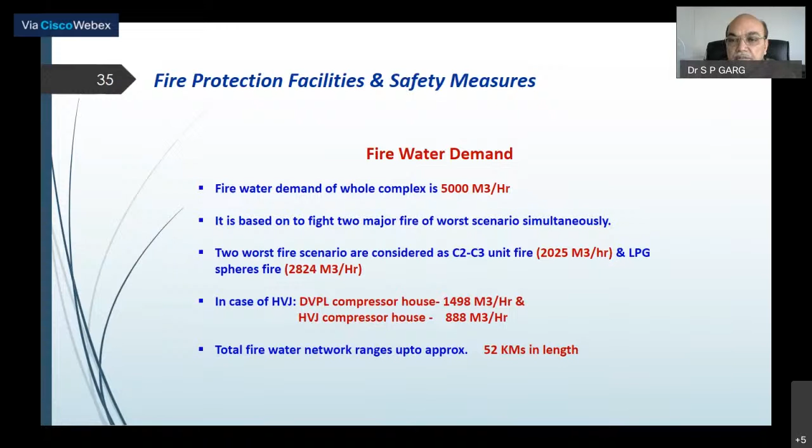Various systems include a CO2 flooding system for protection of machines, FM200 provided in the SCADA room, smoke detection system for substations and other buildings, and a water spray system provided in filter-operated areas, pipeline filters, and other field areas.

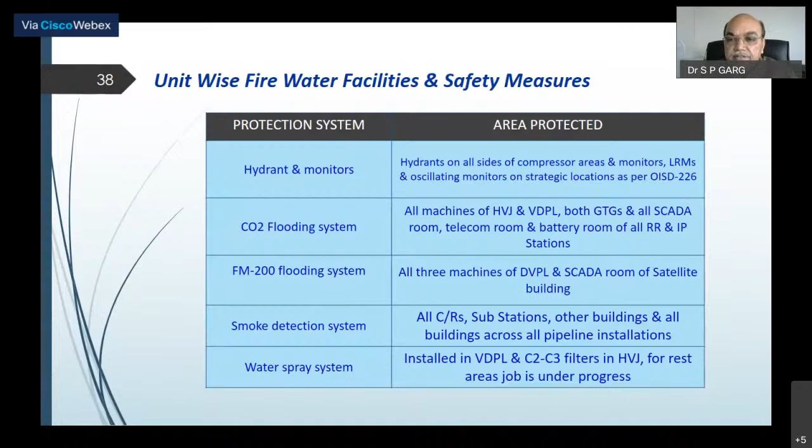Now, finally, looking at the disaster management legislations in India - I think an earlier speaker might have talked on this, so I will not delve in detail. We know of the Factories Act, MSIHC rules, then CAEPPR rules, that is Chemical Accident Emergency Planning, Preparedness and Response rules, the Disaster Management Act, and ERDMP 2010, which has been discussed. These are various rules and regulations connected to disaster management.

Overview of ERDMP: an emergency response disaster management plan is to be prepared for each installation, for each pipeline. In fact, in the recent revision of ERDMP regulation, I happened to be part of the revising committee, and one change brought in is that you could have either a single document for the entire pipeline ERDMP with a local document containing telephone numbers, personnel, and flow charts attached, or, as done earlier, continue with a separate ERDMP for each compressor station or pumping station, as per the entity's convenience.

The 5 parts of the emergency response disaster management plan are pre-emergency, emergency mitigation measures, emergency preparedness measures, emergency response measures, and emergency recovery measures. I will not go into detail - I think you would know all this already.

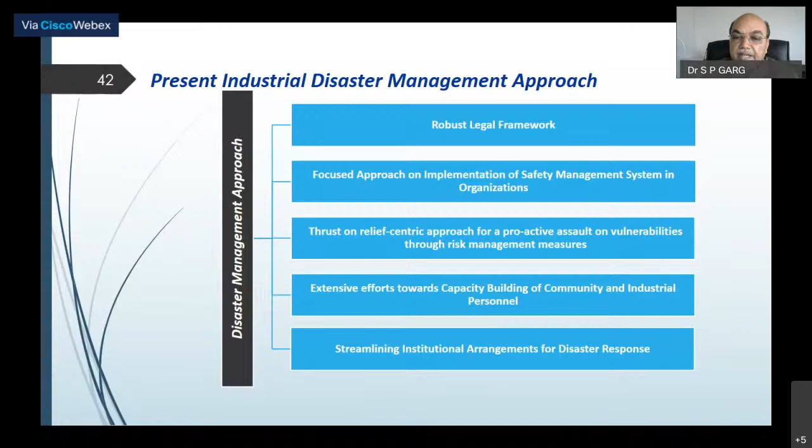In spite of all this, looking at today's scenario, the future challenges of energy pipelines lie in overlapping regulations. Today you have many overlapping regulations - OISD, PNGRB, and other regulation acts - with overlapping provisions that industry is facing difficulty with. PESO has different rules and regulations.

Societal awareness needs to increase. This is another challenge: rapid urbanization near pipelines. Pipelines are laid first, but urbanization happens later, and at a very rapid speed, so it becomes really difficult. The urban population gets exposed to pipeline hazards because of this, and it may not always be possible to move the pipeline away.

Third-party damages are increasing. People are not sensitive and not trying to understand exactly where the pipeline is going, which could be dangerous. They just go and start excavation or civil work. This is happening especially in city gas distribution, again and again in so many places, even though district administration is supporting and warning them. Some cities have made good systems where other agencies are forced to take prior permission before civil activities, but others still have to learn. There are encroachments happening on the right of use, which is detrimental not only for the pipeline but also for the encroachers and people around — it is harmful for them too.

With this I will start with the topic in general - supply chain management. I'm speaking to the reps from Indian Oil Corporation, and we all know how important this supply chain is, and then I will connect it with the IDRN - how it is in the plans as a disaster management for Government of India. So first I will try to give a generic term, supply chain management. I'll try to describe this in a generic sense, and then I will take it to the IDRN and the response, where I'll be speaking further.

So supply chain management is a sequence - we all know it's a sequence of suppliers, transporters, warehousing, manufacturers, pipelines in your case, wholesalers, distributors, retail outlets, and the final customers. So it is a process, an activity wherein the sourcing of raw material up to making it available to the end user - the entire process and the processes involved in managing that particular aspect is known as supply chain management.

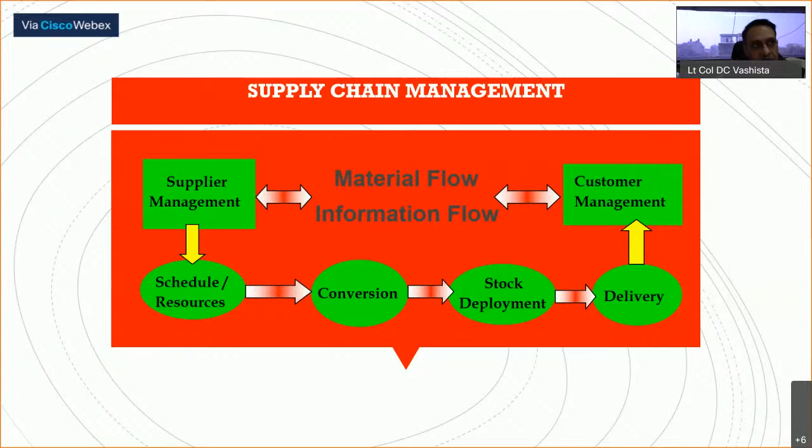This is another graphical form of what I said earlier - customer management, supplier management, and the entire gamut flows in material flow and information flow both ways is supply chain management. In petroleum industry, we all know, we are all dealing in petroleum industry, that the material till it reaches the consumer is the supply chain management, from the raw material to the end product.

The entire chain is the supply chain management, and in this, supply planning and distribution planning are the major things in petroleum industry. Planning, sources, making, delivering, returning, and enabling are the components of supply chain management in stages in petroleum supply chain: exploration, production, refining, marketing, and consumers.

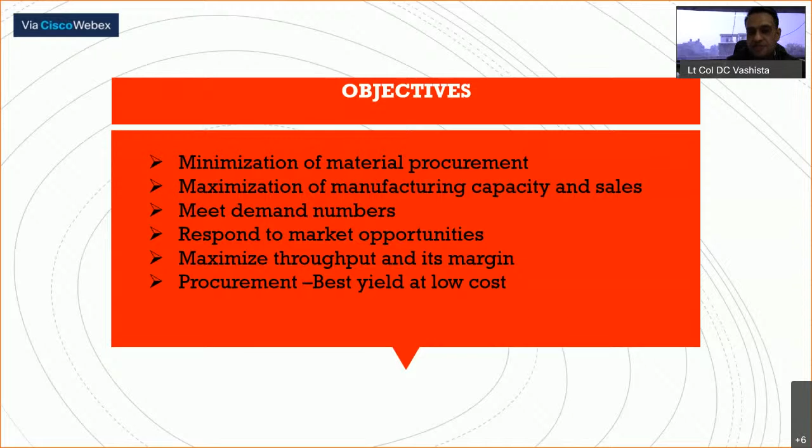And the objectives for the supply chain management for any supply chain manager is the minimization of material procurement, maximization of manufacturing capacity and sales, meeting demand numbers, responding to market, maximizing throughput and its margin, and procurement - best yield at low cost. One of the major aspects of supply chain is inventory management, apart from warehousing and transportation.

As we all know, during COVID-19, this connects with all types of disasters. If you see this slide, it connects with all types of disasters.

Government restrictions in any emergency situation, any disaster, be it a landslide, earthquake, or flood, cause the road network and transportation system to break down. Pipelines may get disconnected, and the availability of labor and manpower to clear lines, for loading, raw material processing, and everything else gets restricted.

In lockdown, we all know what happened during corona, when we were all placed under lockdown. This was the first time, and it was unprecedented. But we have learned that this situation can occur with any type of disaster.

Non-availability of raw material, transport not available, negative sentiments meant buyers were not coming. The demand for petroleum, oils and lubricants had gone down during the pandemic lockdown, because as normal citizens, people were not aware what the next step would be, how the coronavirus would behave, and what directions would come from the government on handling this disaster. Perception of scarcity amongst the masses led to hoarding.

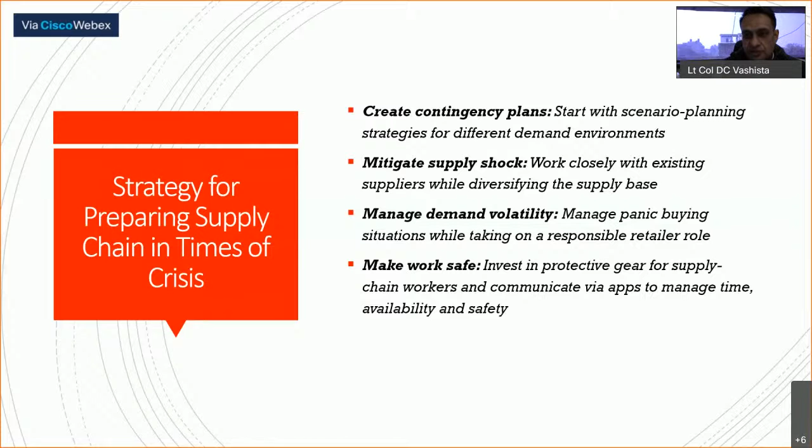However, during any type of emergency situation, like floods, we should give workers protective gear like life jackets and so on. Everything should be planned during normal times to deal with any kind of disaster.

The way forward for handling this is to establish a task force leveraging the latest tools, techniques, and data analytics to create transparency in the entire system, and to establish long-term, short-term, and mid-term goals for meeting demand, supply chain needs, or workforce availability.

Government support should always be sought, and partnerships and synergy across various industries should be built to deal with emergency situations, preparing for upswings as history shows, and the struggle involved.

So how do we integrate this supply chain into our plans? As we all know, under the Government of India's DM Act 2005, we have been given the responsibility of capacity building, to make Indian states, districts, and normal citizens aware of disasters and how to handle these disaster situations.

So the supply chain factor in this, the availability of the inventory which will be utilized to fight various types of disasters, becomes very critical in times of requirement and emergency. Inventory like firefighting equipment, ambulances, ambulance drivers, cranes, JCBs, various types of hammers, boats, life jackets, and things like these are required during various types of disasters.

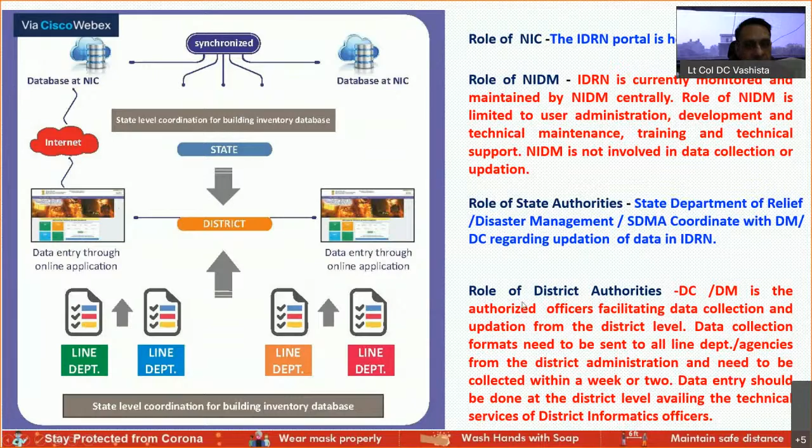So it is available on the internet. However, we are also developing an offline mode. There's an API which we have just developed and given to the states or departments to build their own inventory management program and to integrate our database into their plans.

There are 4 forms - I won't go into details - which are given to the line departments, and they fill those forms and send them to the district administration. From there, the district administration, being the lowest chain in the entire plan for this IDRN portal, feeds the data into the portal.

Here in MHA, the data is put up to the Union Home Secretary every month and is being sent to all the chief commissioners to see the status of their updation and to see where the database needs to be pulled up, or where there is a requirement of inventory in these 289 items to be updated or maintained to fight any disaster.

All aspects of this inventory management or resource management portal are seen here at NIDM. All 36 states and union territories are registered on this portal. Out of 740 districts, 721 have been registered, and the balance are in process due to internet connectivity issues with the districts being far-flung.